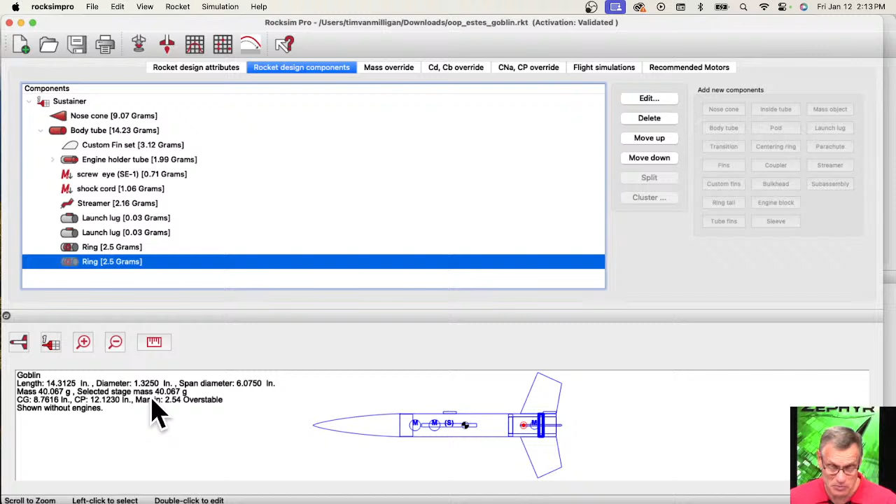So basically, if you were to upscale, you'd start from whatever RockSim file you had. Since this is 1.325 inches in diameter, first we got to figure out what scale we're going to scale this up to, because there's a feature under the Rocket menu where you can do a scale by a scale factor. So you need to know what scale factor it is, and to get that you got to do a little bit of math. Get out your calculator, and I'll bring up a calculator here.

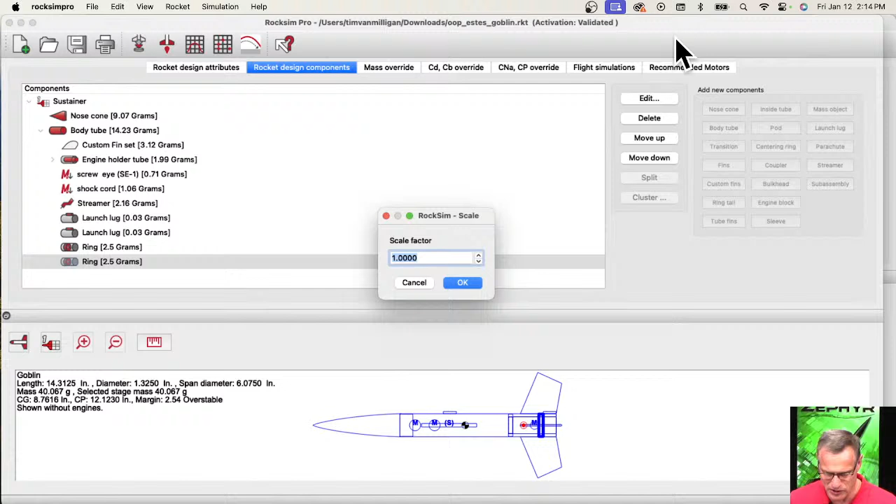Here's a calculator, and we're going to take 3 inches, because that's the new size, and divide it by this diameter right here, 1.325. Divided by 1.325 equals 2.2641. So we're going to copy that, and paste it right there... it didn't paste. Was it 46? 2.264.

And we hit scale, okay, and what happened was it just scaled it up, and it's just a smidge under 3 inches, so that's close enough. So when you do that, now your fin has been scaled up. However, there are some problems with this design.

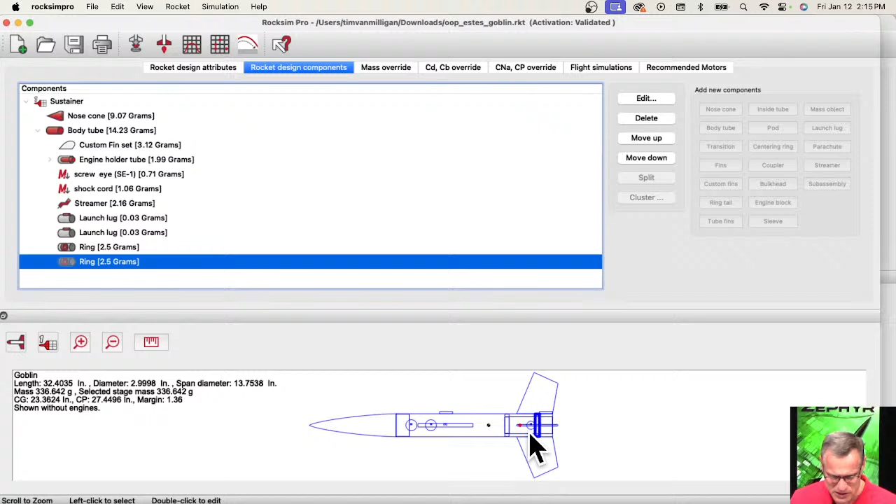We talked about this a couple weeks ago when we talked about scaling rockets. If you look at the motor mount diameter, here's the engine holder tube. If I open that up and look at this, we have an inside diameter of 2.15 inches. That's massive, bigger than a 54 millimeter. You could put a 54 millimeter in it, but you're probably not going to fly this 3-inch kit on a 54 millimeter tube.

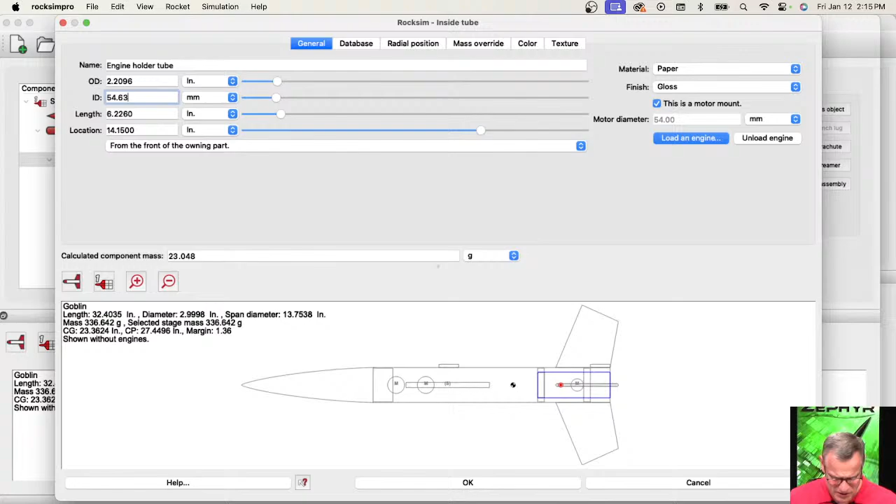That's the one issue we talked about, and you can see that by going back to the archives on the website. Just come here and come down here, I think that was just like 2 weeks ago. Okay, how to upscale your fins right here. That was episode 149, and here's the link to it.

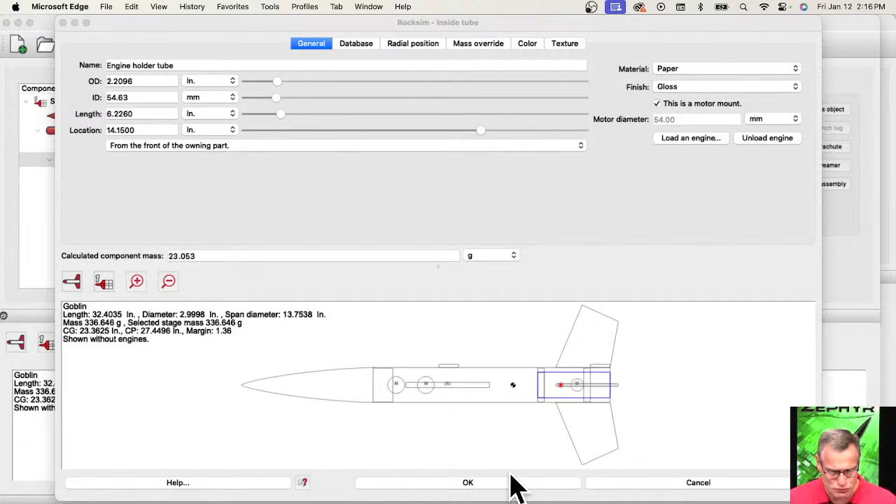So that's one way to do it, is just to scale up the rocket. Another way to do it is, let me cancel out of this, you can upscale the fin by itself. But basically it's the same thing. You're going to scale by the scale factor, and then save the fin by itself.

So to do that, you go here to the fin. You got to find the fin, open the fin, and this is a custom fin. Custom fin means it's not a trapezoid. It looks sort of like a trapezoid, but to be a trapezoid you have to have 2 parallel edges, and there's not 2 parallel edges on this fin at all. So that's what makes it a custom fin.

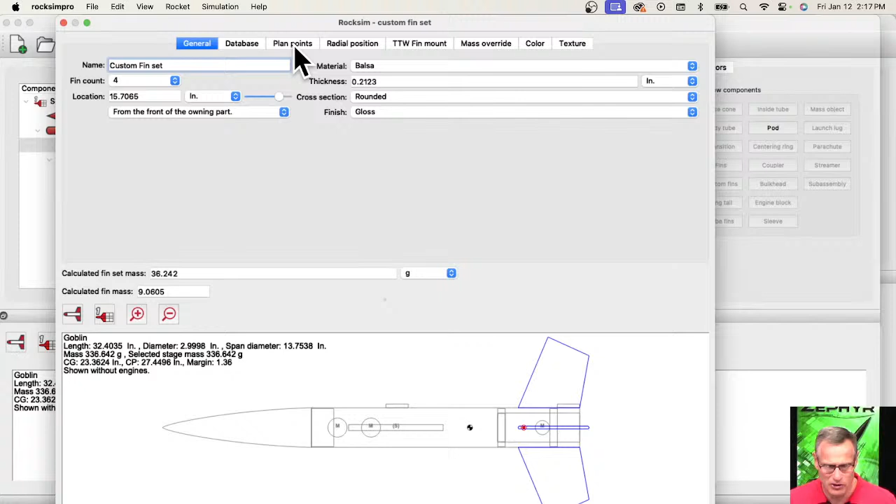If you come here to the plan points on a custom fin, right here, this button is the scale button. And if I click on that, again it brings up that scale factor thing, and then you can scale it.

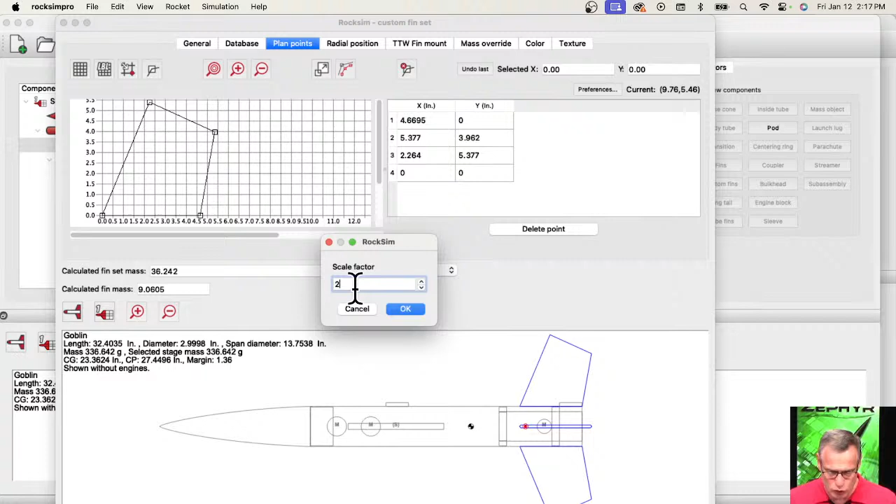So if I scaled it by, you know, 2, you're going to see that the size of this fin is going to be twice as big. And it is, it's twice as big, and it actually shifted it. It scaled everything on the fin, including the location from where it was. So I'm going to say from the base of the owning part, I'm going to say 0, just to show you how big that fin got.

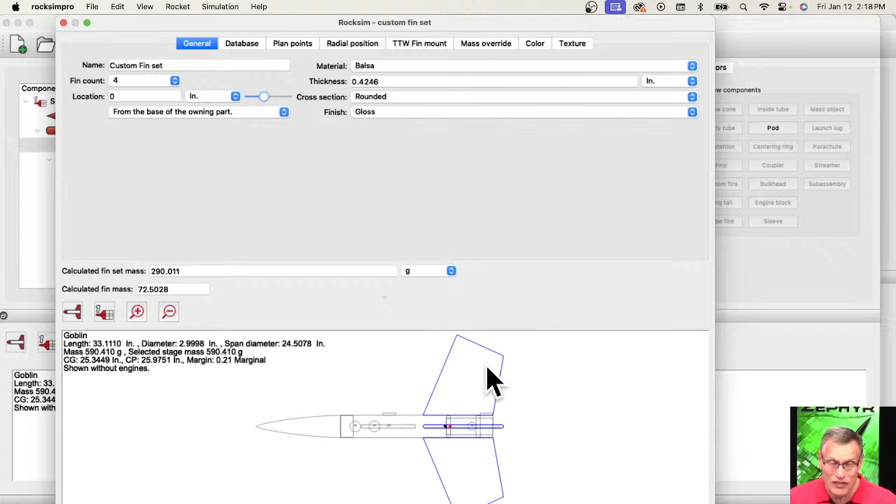At this point, what you could do is go to the database tab, and you can save this into the database. So we could say super size, this is an Estes, or you can say custom manufacturer, 2X. And you can give it a different description, you know, Great Goblin, super sized fin. And then you can save it to the database.

And you're going to get this screen, and then you just click OK. So now I've just saved that particular fin to the database.

Now to use that fin, I'm going to open up a new design. Let's see what we can open up here. I just want basically a rocket without fins on it, or something similar. If I go to my RockSim designs, here's the catalyst, I'm going to open that up. It asks to save changes - no, I don't care.

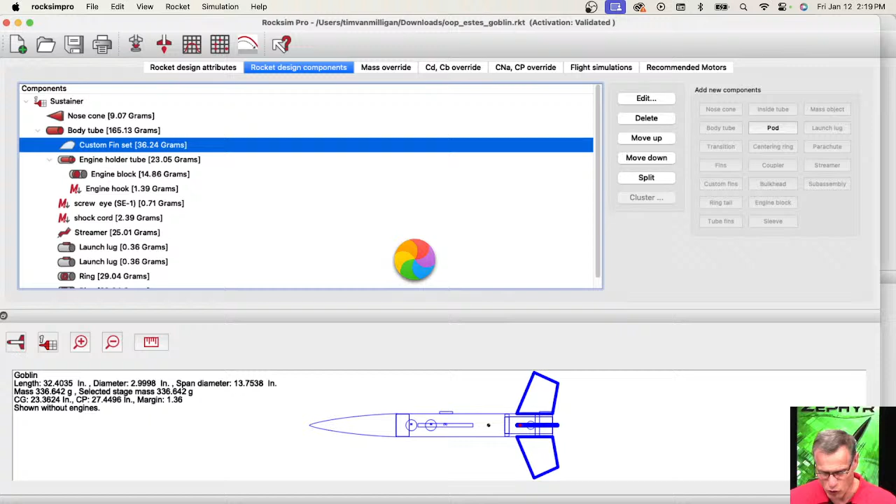Let's see if it's going to crash on me, because it usually crashes when you're opening a new design. Nope, it didn't crash. Okay, so here's the catalyst.

And it already has fins on it, so I'm going to take those fins off. I'm going to delete the fins, and I'll say yes.

Okay, so now my fins are gone, and now I'm going to add fins back. I'm going to select the tube where I'm going to add them, and then come down here to custom fins. When you click on that - my computer's running a little slow today, I've got too many things open at once. Let me start closing some things up to free up memory.

Okay, so what happened was RockSim popped up over here. It's looking in the database. This blue fin is just a random shaped fin that it puts on the rocket.

But if I come down here and look in the database, I should find my custom fin - that's this Super Goblin fin. Well, where is it? There it is, right up there - it was on the top.

And you click OK, and it should draw it here in just a second. There it is, it drew the new fin on there. So that's another way to do it.

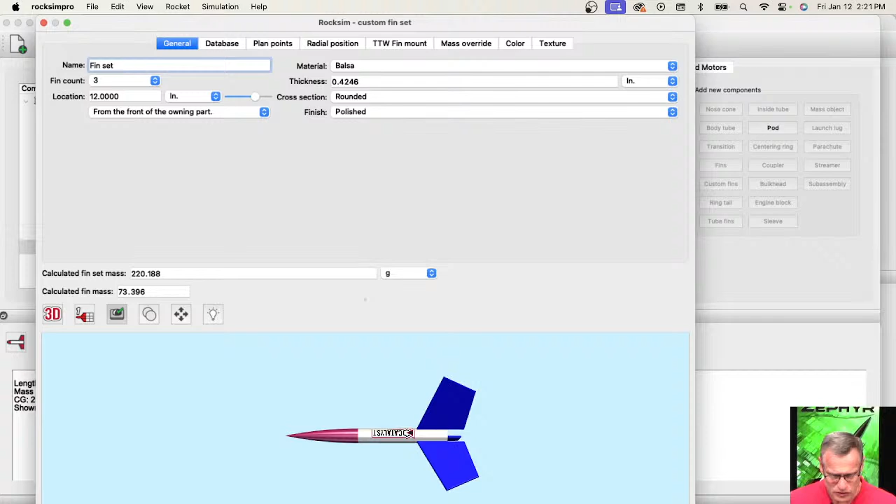So I'm going to click cancel out of here. Now the third way to do it - and this sounds like the way he described in his email to me. Basically, he had the fin because he bought the kit, and he traced the fin on a sheet of paper, getting points for all the corners, and then tried to input them into the design.

So let's show you how to do that - this is a third way of doing fins. What I've gone and done is get a piece of graph paper, because I recommend using graph paper when tracing fins, as it makes it easy to find the dimensions. On this rocket here I've got two fins because it's a two-stage rocket, but let's just delete one of them.

Come on, delete you. Okay, so random fin shape. The first thing you want to do is put the corner of the fin - this is the corner that attaches to the tube, and it's the front edge, the leading edge, along the body tube here - right at an intersection of two of the lines.

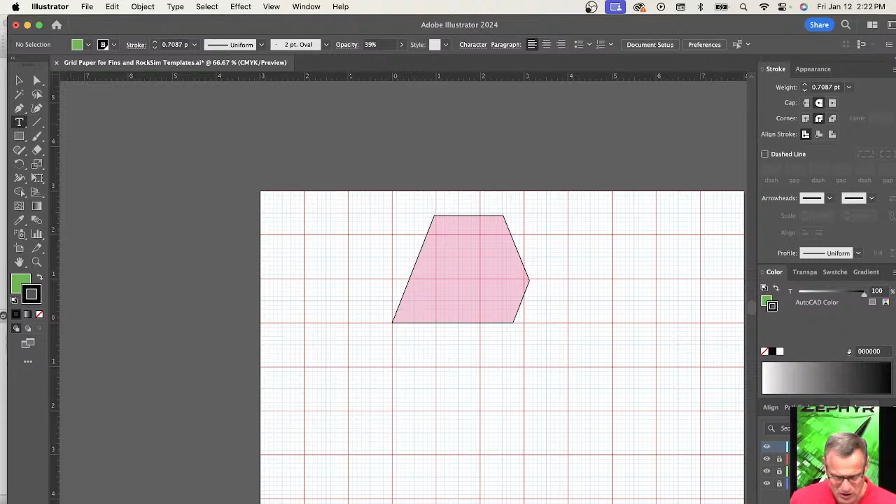And what I'm going to do is label all my points. So this is my 0, 0 point. I'm going to get a text box and type in 0, 0.

Okay, so then I'm going to measure all the points. The next point we want to measure is this one right here, the back edge. If I zoom in, these red squares are 1 inch apart, so we've got 1 inch, 2 inch, and here's 3 inch - so it's not 3 inch.

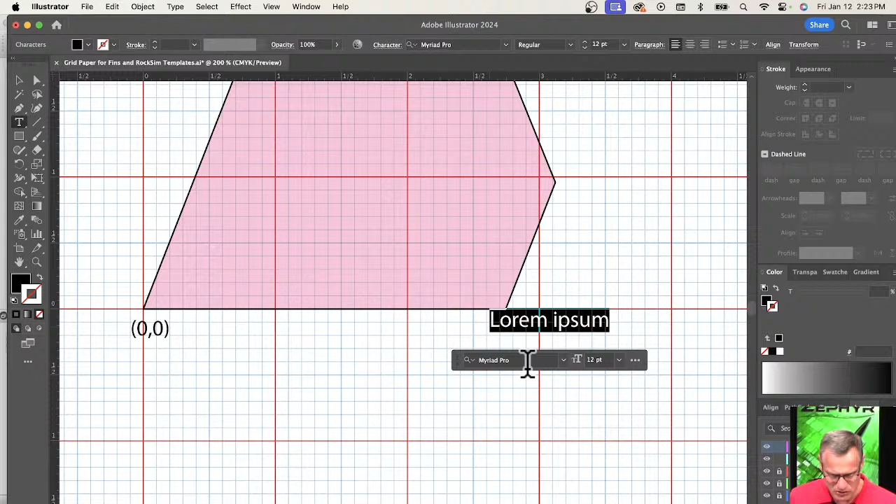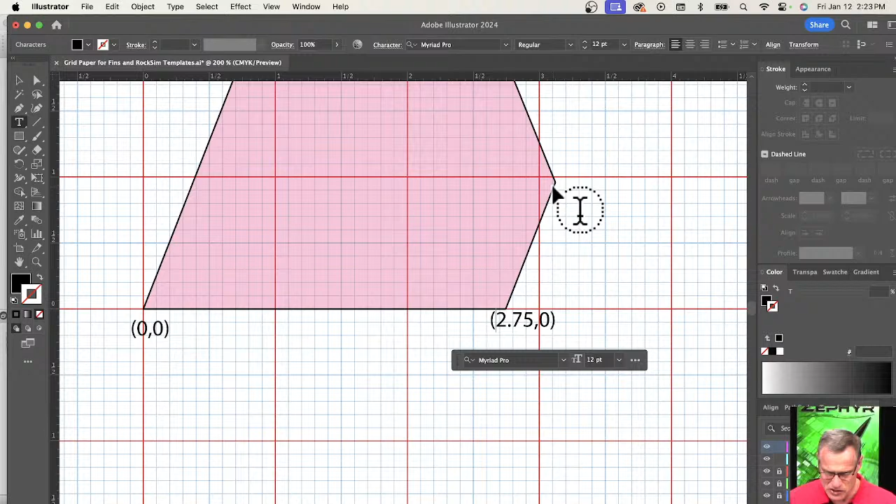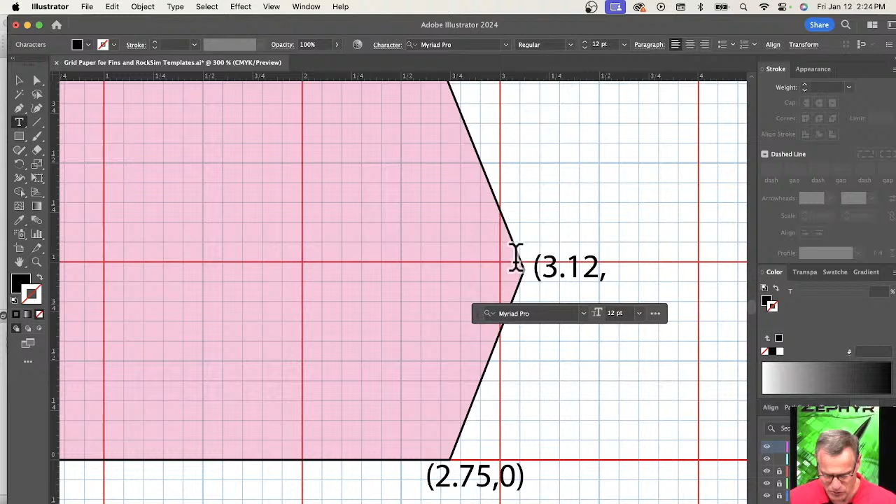So now we can go to this point right here. This red line is 3 inches, so we're going to call it 3.12, and estimate comma how many inches off it is. This is 1 inch right here, so it's not quite 1 inch - this blue line right here is 0.9, and I'm going to call it 0.96.

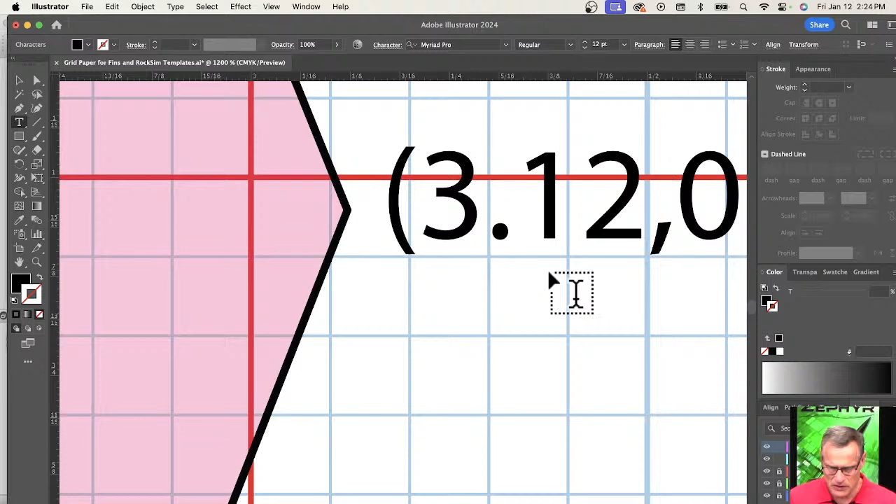0.96 inches. Okay, let's zoom out. Okay, so that's that point.

Oops, I didn't want that, I was trying to make a new text box there. Okay, so now let's go to this one up here. This point right here is 1, 2. This blue line right here is 0.5, so we'll call it 2.53.

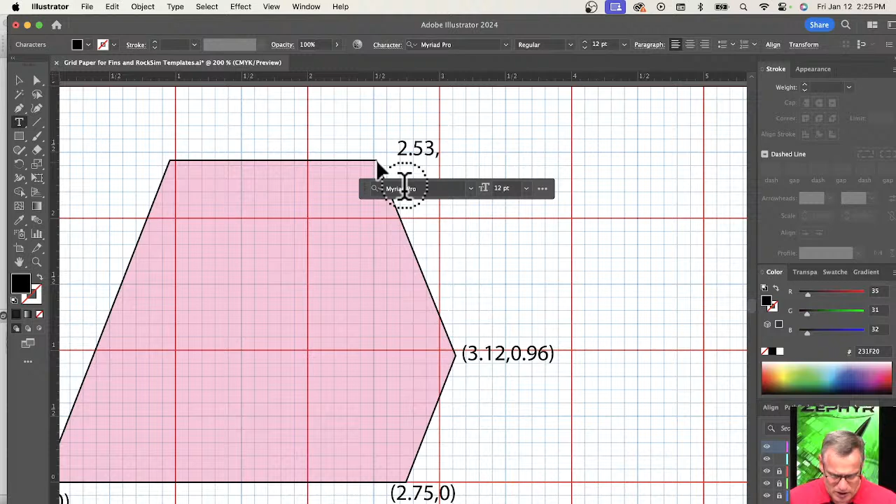I need my text tool. 2.53 inches, and then how many inches off this way? 1, 2, and we'll call it 2.44. So that's that point.

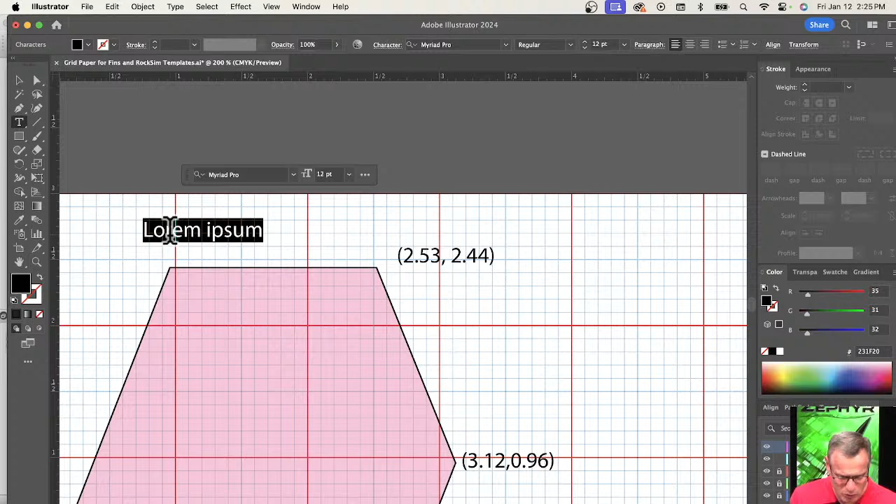And then the final point is right here, underneath this box. Box, go away. Okay, so this is 1 inch right here, this red line. So we'll call it 0.95. And it's going to be on the same line as this, 2.44. So: 0.95, 2.44. So here are all my vertices that I need to put into RockSim.

So I'm going to come here to, where'd my RockSim go? There it is. So we're going to add a new fin, and this is a custom fin, remember. So we're going to add custom fin.

And it's running really slow. I've got so many things running right now. Let me quit some things, see if that helps speed things up at all. Get rid of Spotify.

Okay, so again, it's going to look into the database, and I'm going to cancel out of it this time. And we're going to go to the plan points. Let's see if I can make this window.

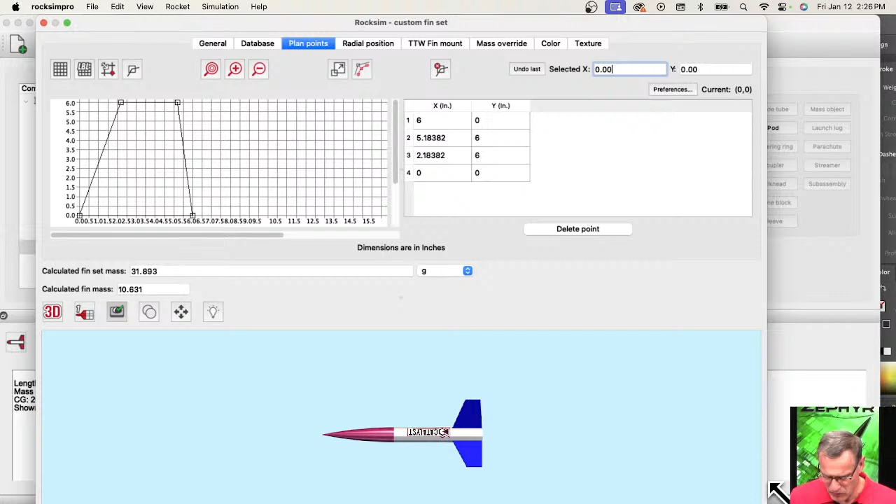Okay, so we need 5 points for this design, so I can just click on here to add a point, and that will give me 5 points. And now we're going to put in all the coordinates right here on this grid. So the 0,0 point, point number 6, is the front one, and this point right here, where it attaches at the back end of the tube, is point number 1. So we're going to work in reverse order. So 0,0 is that front point. So then the next one is 0.95 and 2.44. So that's this one.

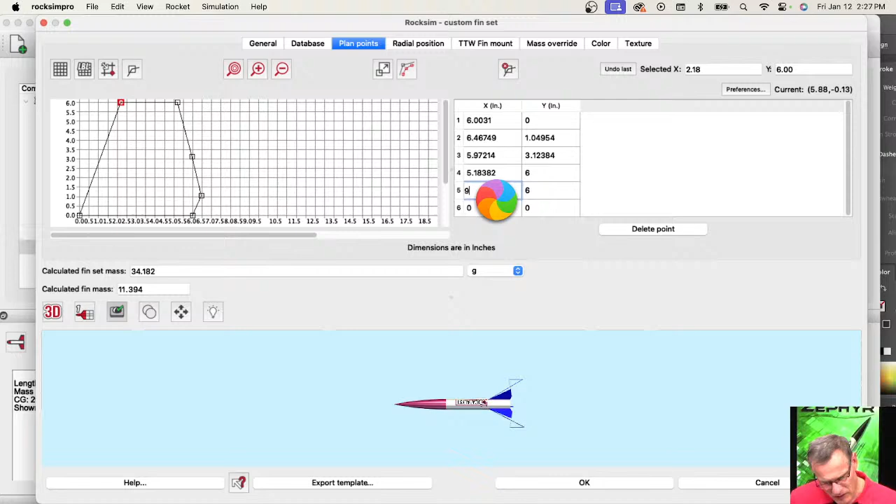0.95. Come on. 0.95. It's running so slow that it just crashed.

All right, I got RockSim open. Let's go open recent, catalyst. And let's get rid of these fins again. This is still running slow. This thing came up here, so okay, I don't care about that.

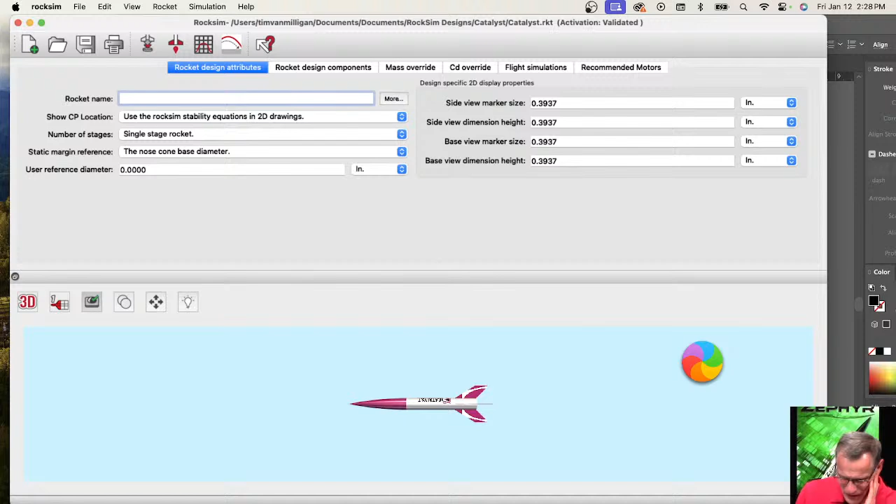Okay, rocket design components, come on. What can I close? I think it's this program here with all the coordinates on it. Quit that. I'm going to take a screenshot of this, so all I need on that program is that. So I took a screenshot, and that way I can close this and try to free up some memory. Don't save.

Okay, so back to RockSim. I'm going to clear out this fin. Now the fins that we have here are pretty small for this rocket. Let's close this too. Really delete this component, and I want to say yes. Okay.

All right, so now we're going to add the fin back. I think you get the idea, so we want a custom fin. Anything else I can close? Let's close Microsoft Edge. Okay, so we've got the rocket drawn right there.

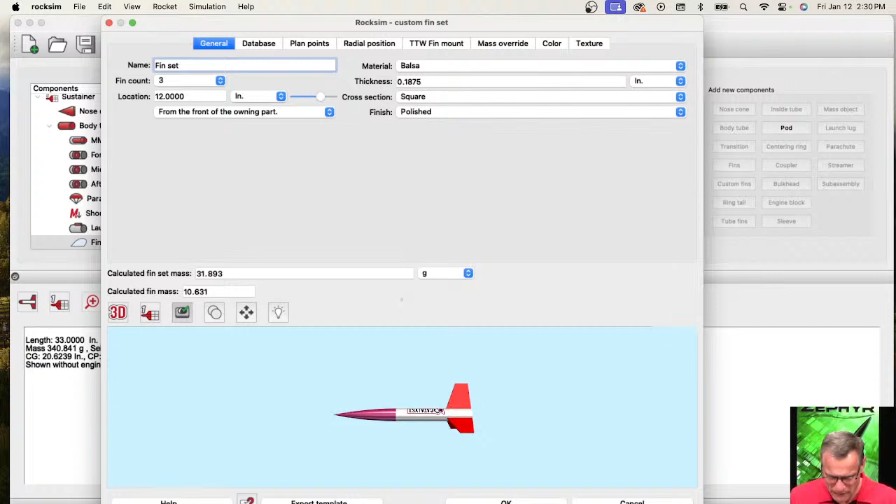Cancel out of the database, go to the plan points, and I need to find that Finder window and put it on the desktop. There's that screenshot.

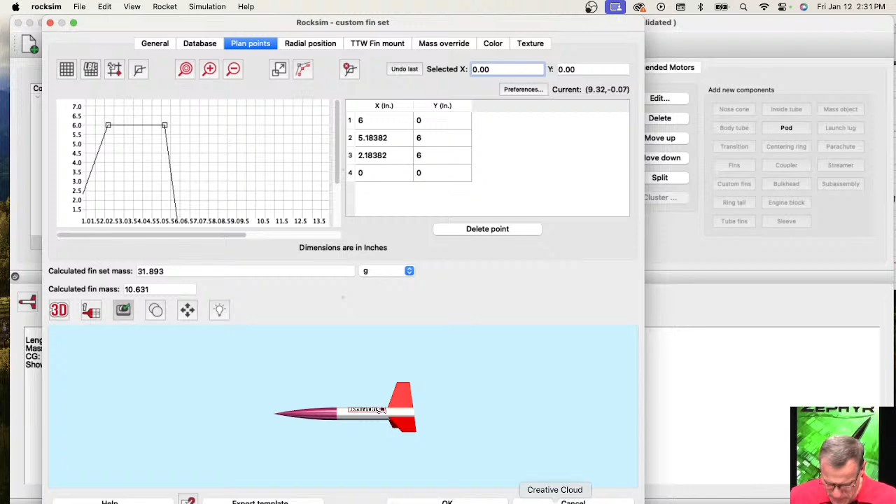Okay, close that. Okay, so here is my points. But just put it right behind everything. I can't see it. Now we'll have to go back and forth. How is this program, Preview? I'll just slide it off the screen here. Come on.

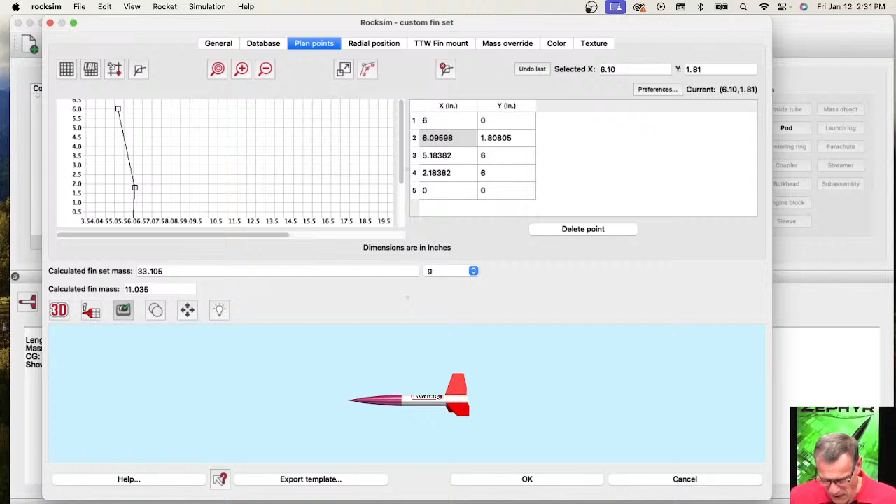Okay, so my first point, I need a fifth point, so I'm going to be here again and just click on it to add a point. Come on, add a point. It's just running so slow. Normally RockSim is blazing fast, but when I've got so many things going on, you know, I've got YouTube streaming and OBS software that runs it.

Okay, so there's my 5 points, and what we'll do is this one is 0.95, so I've got to double click it, 0.95, hit the tab, and this is 2.44, hit the tab again, so we're going to go to the next point, and that one was 2.53, and it's also 2.44. I'm going to go to this point.

And this point was 3.12 and 0.96. And then the final point is 2.75 and 0.

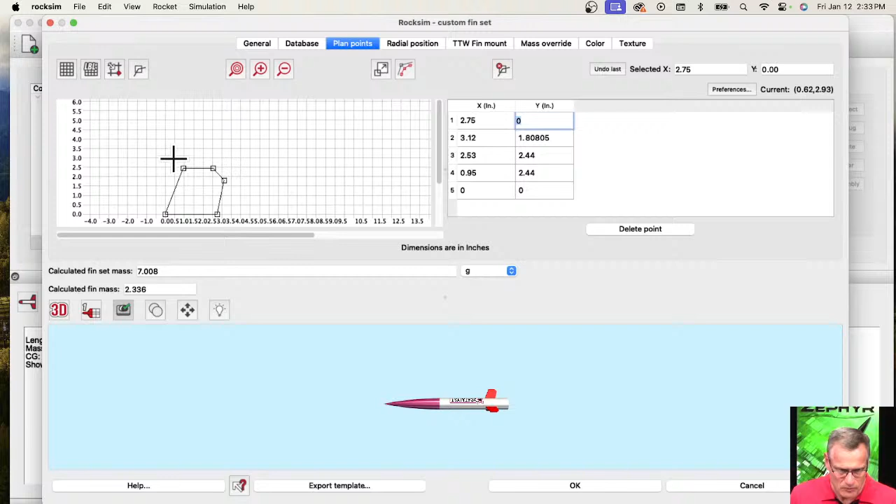Okay, so that is the fin that we had drawn in the other program. So this doesn't look quite right, something's wrong. This point right here is too high, 3.12. Let's see this point here. This didn't take. That should be 0.96.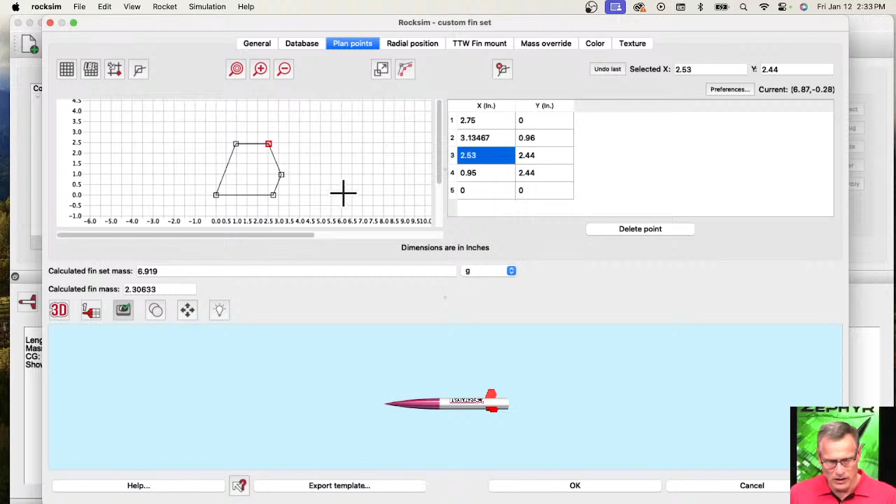So now that's the fin, although on this particular rocket it doesn't look right, but that was the fin that I had traced on the graph paper.

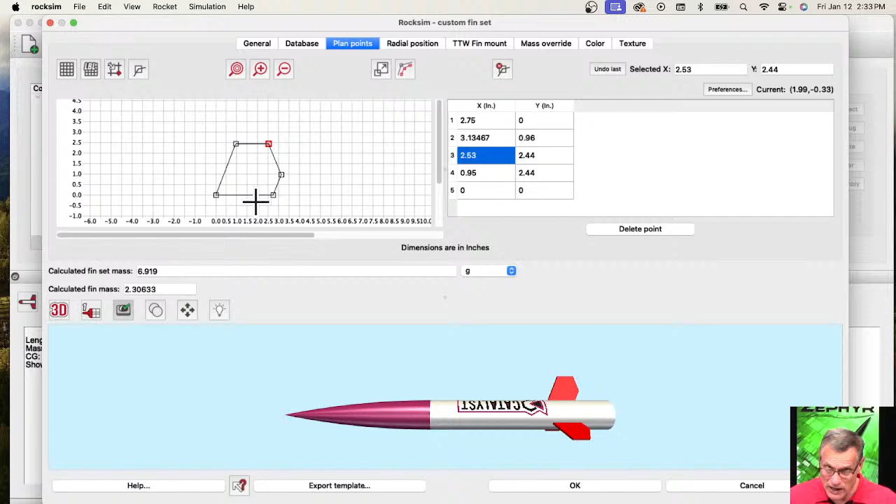I had used the exact coordinates for all the corners to put that onto RockSim. And again, if you save this to the database, you can call up that fin for any other design. You don't have to, but that's just how it works.

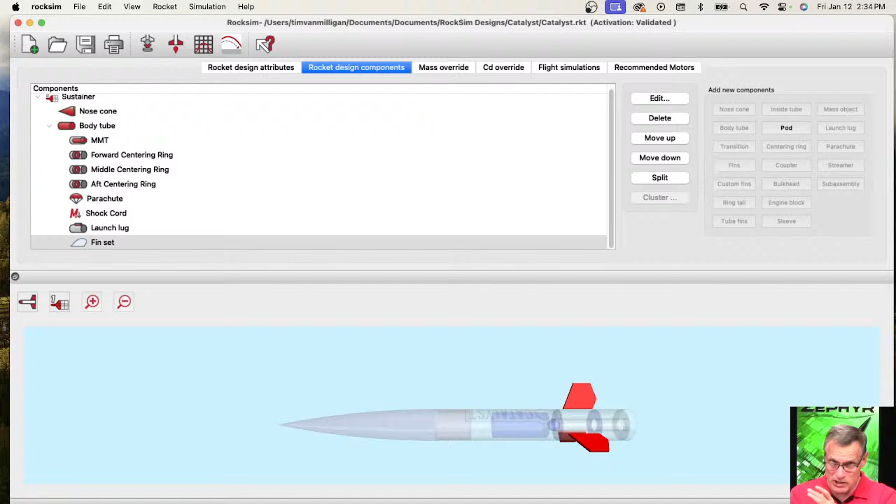I think that answers how to put a custom fin into RockSim. There were three different methods: one, we upscaled an existing RockSim design; second, we upscaled just the fin and saved it to the database; and third, we entered the coordinates exactly from what we traced from the balsa sheet.

Let's see if we got any other questions. Craig Hefferman asks, how do I add an ejection charge baffle to my design in RockSim? So on this design here, let's go to 2D.

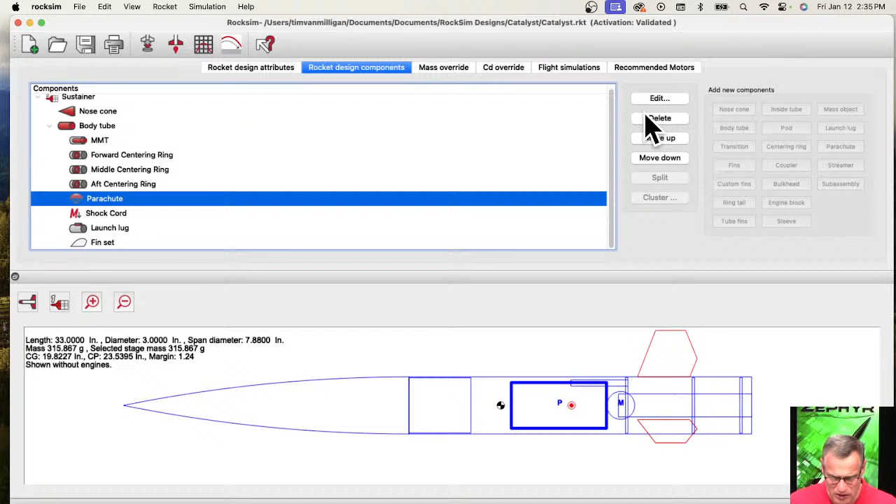Let's say we want to put a baffle right here where the parachute is. So let me pull the parachute and we'll just delete it to get it out of the way. Okay, so now the parachute's gone.

This right here with the M on it is the shock cord, we'll leave that alone. This little tube right here is the launch lug, we'll leave that alone too. So what does the baffle consist of? Typically it's two bulkheads and maybe a tube that runs through the middle.

Adding a bulkhead is pretty easy, just add the components the best that you can. What's important is that if the components are on the inside of the rocket, the only thing that really matters is the mass and the location of that mass.

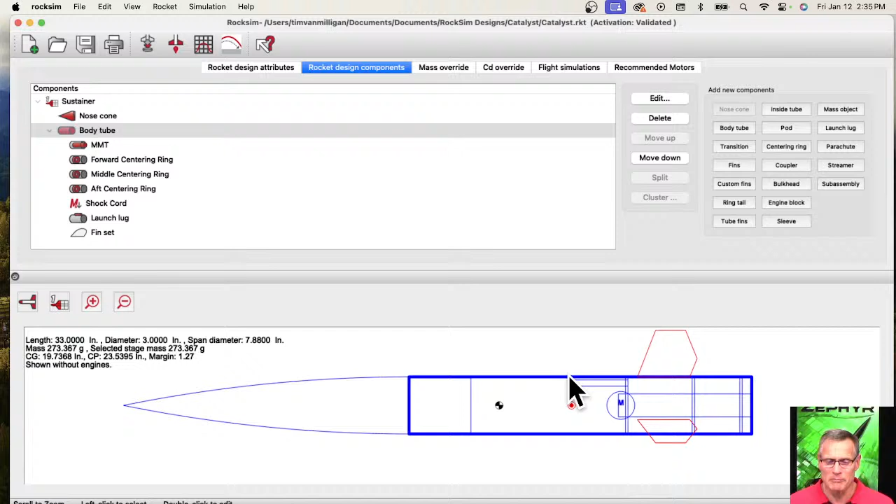So say your centering rings, instead of being concentric with the hole right in the middle, say your hole was off to one side — that's typical in a baffle. You've got a hole off to one side where the ejection charge goes through, and then on the forward ring the hole is on the other side, so that if you look at it from a side view, the gas goes up, then has to turn a corner and continue going up.

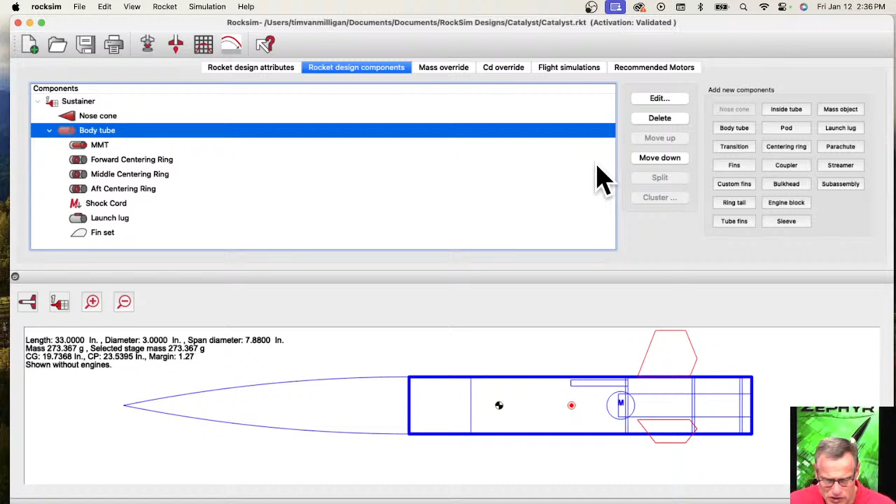I can actually do that. So let's create inside of here — we're going to put our centering rings in first. You've got to say where your centering ring is going to go. I selected the body tube, and I'll cancel out of the database because that always comes up first. Let's change this to a side view.

Okay, so right now my centering ring is right there, and we'll call this one the back centering ring. Oops, too far back. Okay, so we'll go right there. We'll give it a thickness — let's call it 1/8 of an inch.

So now it has thickness, and it's looking for an ID. Let's call it a BT50 on the inside, so that's 0.976 inches. Did it take? Come on, it's running so slow. Well, it won't take it unless I uncheck this. 976 — okay, so now it actually put a hole in that ring.

We can't see it because it's from the side view, but the hole is right in the middle. So we'll call this the aft bulkhead for baffle.

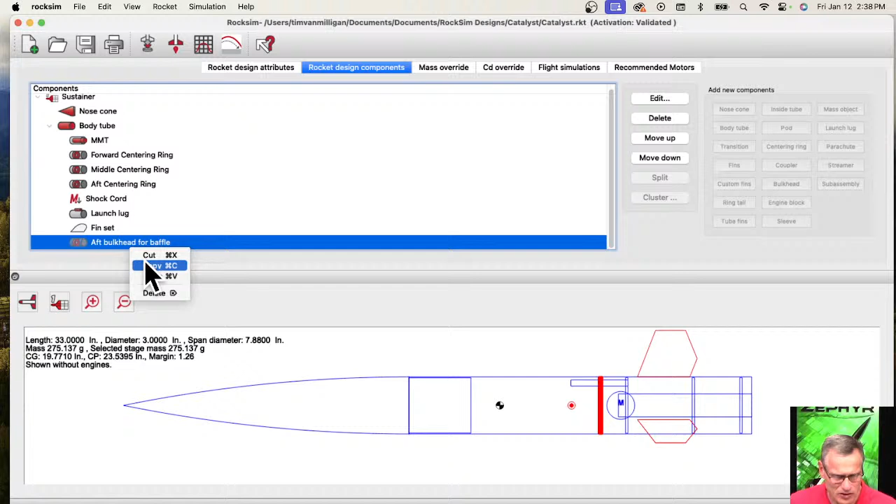Okay, so that's one ring, and now there's another ring like in front of that, and we can just duplicate this. So I'm just going to highlight it, do a copy, then select the body tube, right click, and say paste — it pastes another ring right on top. Now we need to change the location of one of these.

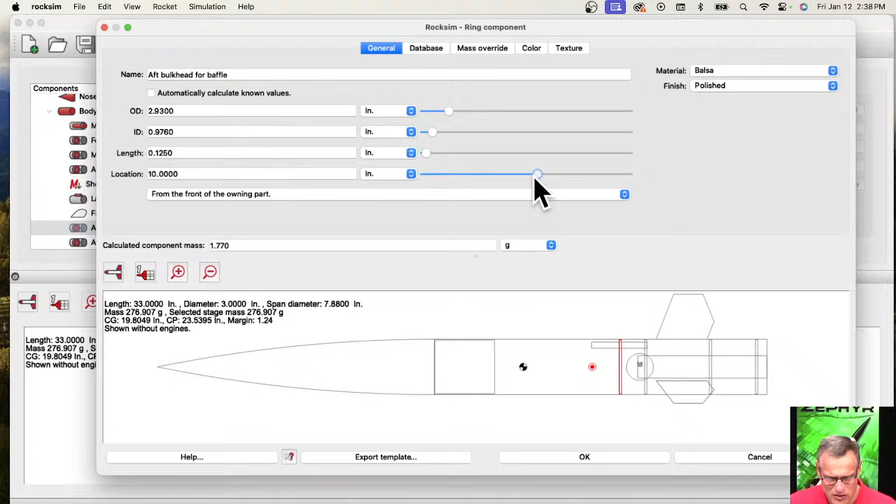So I'm going to change the location of this one, and I'll just slide it forward a bit. We'll change the name to the forward bulkhead for the baffle, and this one also has a centering ring in it. So I can click OK.

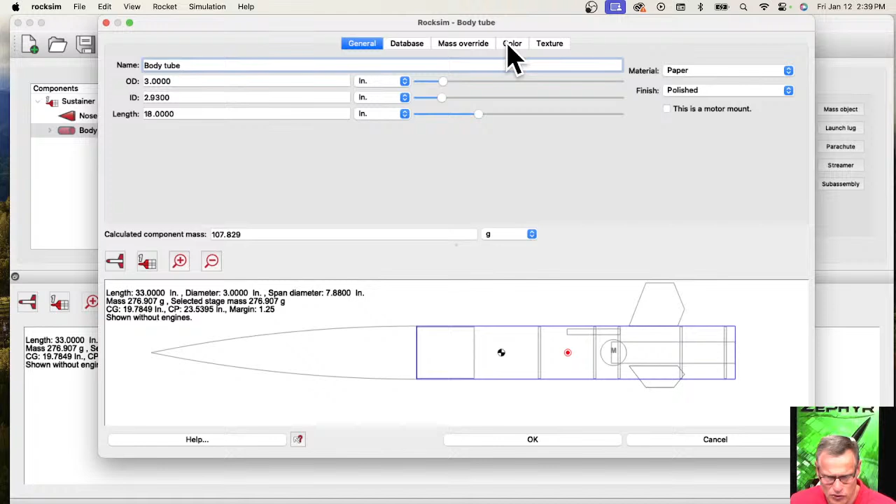Let me take this body tube right here and make it see-through, so we can see the holes. Come here to color and change the opacity to something real small, or you can even make it 0 if you want, and just click OK. Now if I go here to the 3D, I made that tube clear so we can see through it.

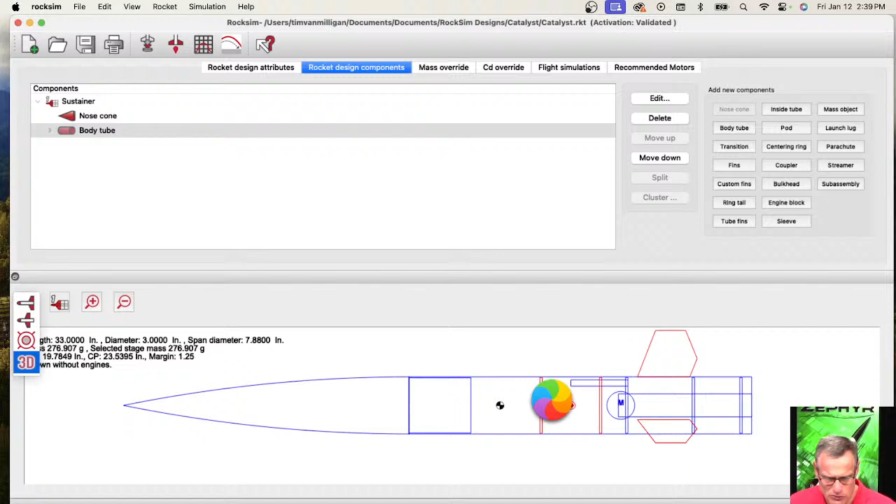So we can see these rings on the inside as soon as it wants to draw it. And why is it not doing that? Well, there it is — that worked.

Okay, so you can see the holes that are through the baffles, and now there might be a tube in here. If the tube is offset to one side or the other, it doesn't really matter for the weight. So let's put a tube in here.

So I got to select that body tube, and then we're going to say an inside tube. Click over here. It's running so slow, I'm sorry for that, it's just too much running on my computer right now. Normally it's blazing fast.

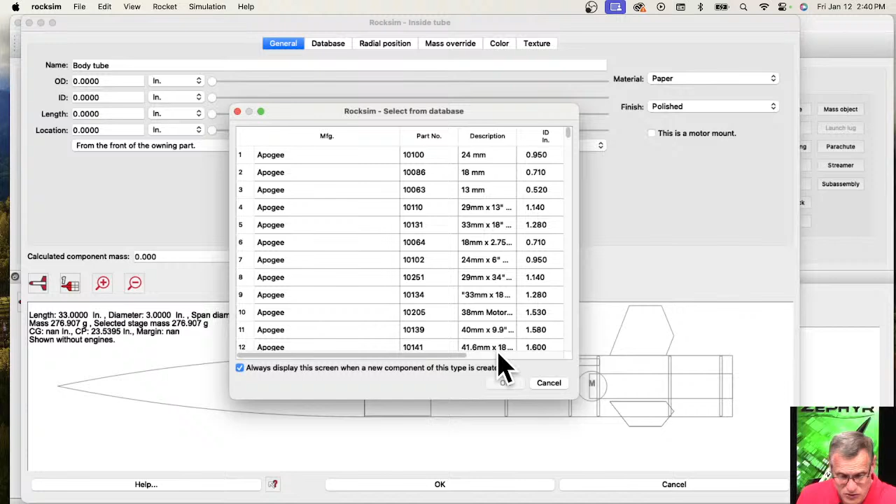All right, so this is the baffle tube. And I should have selected a diameter, so 0.976. I'm doing these numbers from memory, so 0.950. And we'll say the length is 2 inches.

Okay, so I put it right there. And I'm going to take that tube and slide it back. Oops, slid it too far. Okay, so you see what I did? I took that, I got my front baffle ring, my rear baffle ring, and I got a tube right there. And I'll say OK.

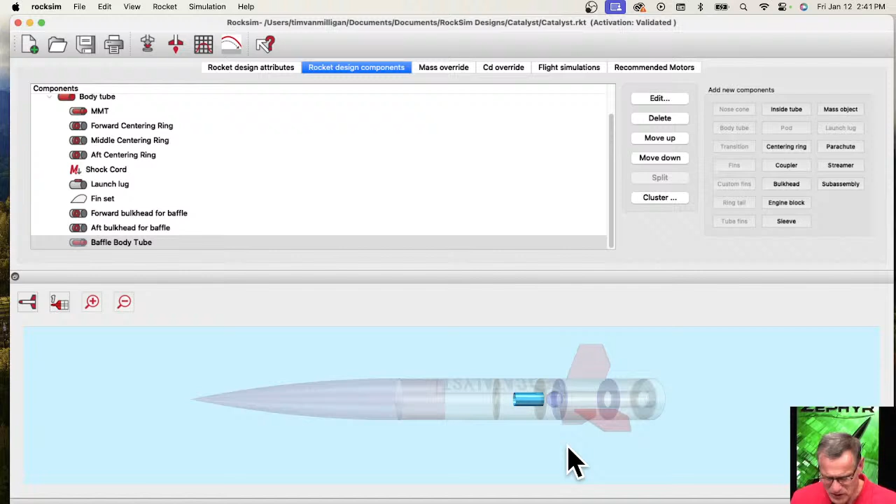And when we go back to the main screen, we should have a 3D view showing that tube on the inside. So there's the tube on the inside. So now, from a simulation point of view, it really doesn't matter that this is concentric, but in real life you'd probably have it off to one side or the other.

You might even have two tubes in here, a short tube on the back and a short tube on the front. You could model that in RockSim, and I can show you how to do it, but it's not going to make a difference when running the simulation, because RockSim only cares about the mass and where the mass is in relation to the center of gravity, where the rocket balances. If you wanted to move that tube off to the side,

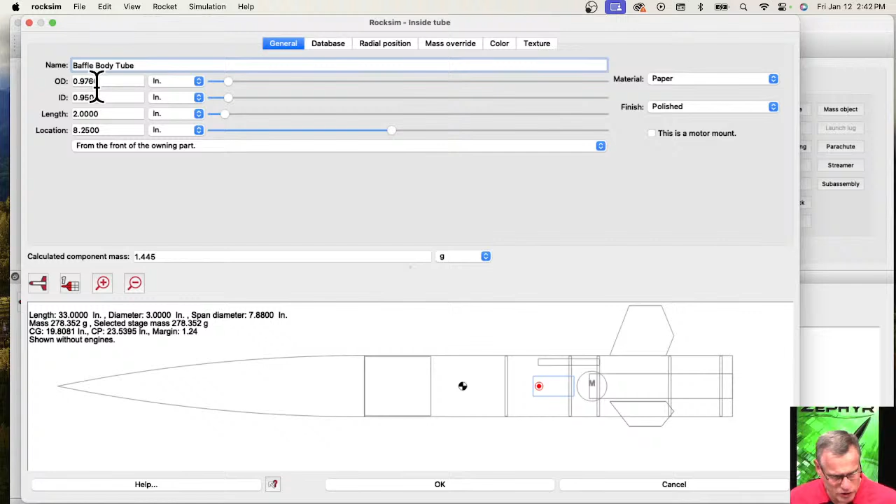I would go here to radial position, and see right now the radial distance is 0. If I change that, you can see I moved it off to one side, like right there. And click OK.

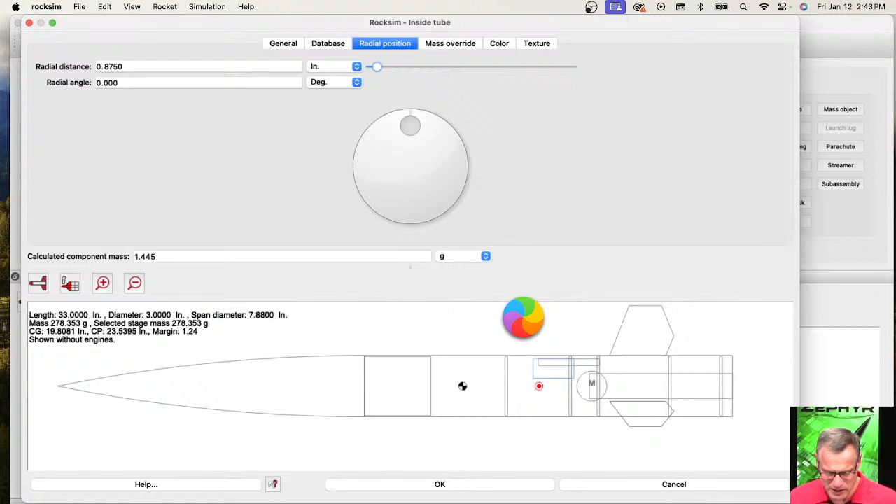And when we see it in 3D, we'll see it off to one side. But you see the holes are still over there. So now if you wanted to move the hole over to here, you can do that too. So that's my aft bulkhead.

And what we're going to do, as soon as it opens, while we're doing that, let me check here.

Okay, so people have been telling me that the Goblin was a BT-55, not a BT-50. That's good.

Okay, so here's the centering ring, and what we'll do is we're gonna just click this box right here, automatically calculate the known values. If I click on that,

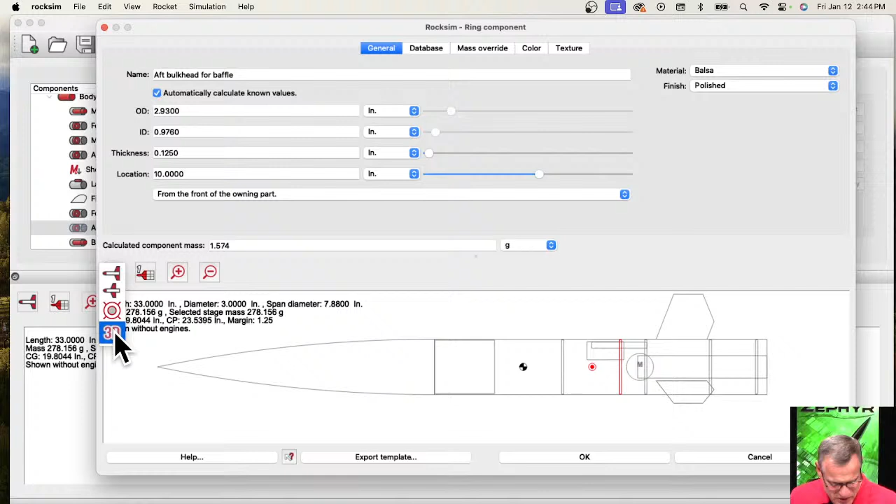I want to see this in 3D, see if it moved. Yes, it did. You see that it actually did move that hole. And you could, if you can see through the tube, that will verify that it's not a bulkhead.

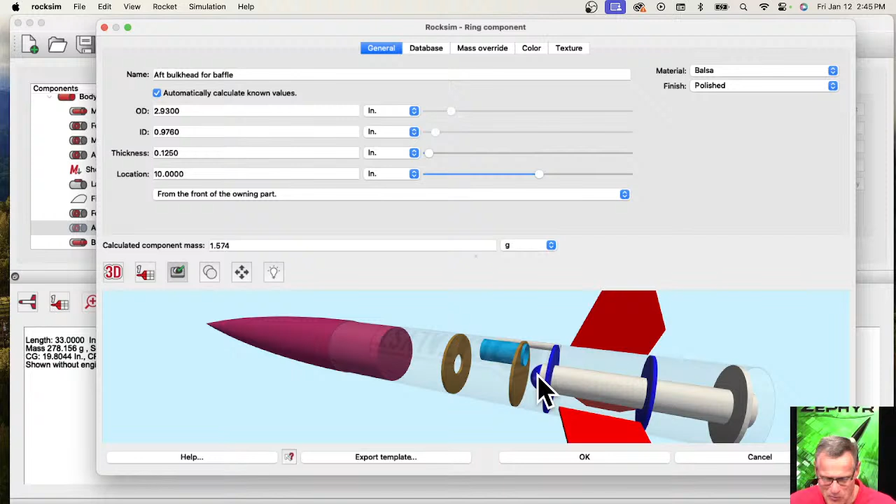So that could be a baffle. Typically, though, what you have is another tube on this baffle coming from this side, so the ejection charge has to come out of this tube where this sphere is. That sphere is the mass object for the shock cord. So the ejection charge comes out, has to come around this corner, go through that tube, and then turn the corner, come back down here, and then out through the tube that is not there. But that is how I would build a baffle in RockSim.

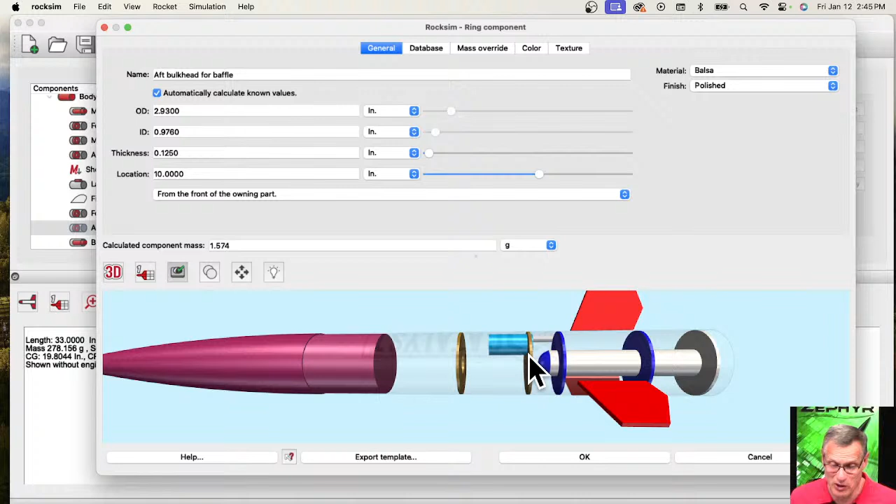If you wanted it to look exactly how you build it. But from a simulation standpoint, if I have two centering rings, it doesn't matter where the hole is, the centering ring is going to weigh the same. Because you're taking a circle and taking another circle out of it, and it doesn't matter where that other circle was located,

it's still going to weigh the same. If you wanted to do just quick and dirty, that's what I would do. And if you wanted to do it even faster, you just weigh all your components and just use a mass object. That's the really fast way to do it.

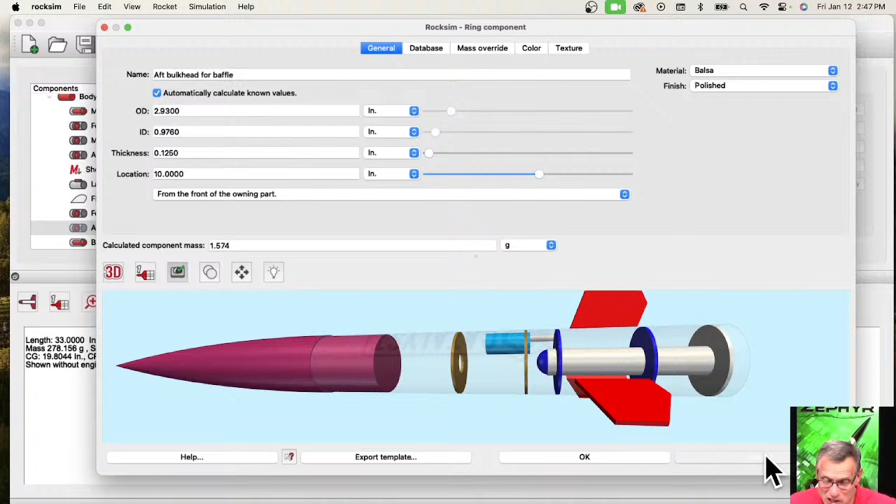Fatbank asks, can RockSim run on an iPad? And the answer is no. However, I've got a solution for running simulations, and that is to run the launch visualizer. The launch visualizer is in the cloud, and it can run on any web browser. So you take your iPad, open up your browser, and go to rocksim.com, and now you can run simulations. You can't design a rocket in the launch visualizer, and you can't modify a rocket, but you can do anything you want with the simulation. As soon as it's done loading, I'll show you.

Jeff Kortowski says, Thrust Curve used to have a simple simulator as part of their app.

So here's the launch visualizer. If I log in, I have an account here, sign in. Okay, so I am now signed in. If I go up here, you can see I'm signed in, and I've only got 91 credits available, because I was playing around this week using up a lot of credits, doing some weird stuff. Over here you can select the rocket design, and in my database I've already uploaded a ton of designs. But from the demo designs that come with the launch visualizer, there are 6 designs. The reason we did that is every user has their own disk space, because your simulations, once you run them, are uniquely yours.

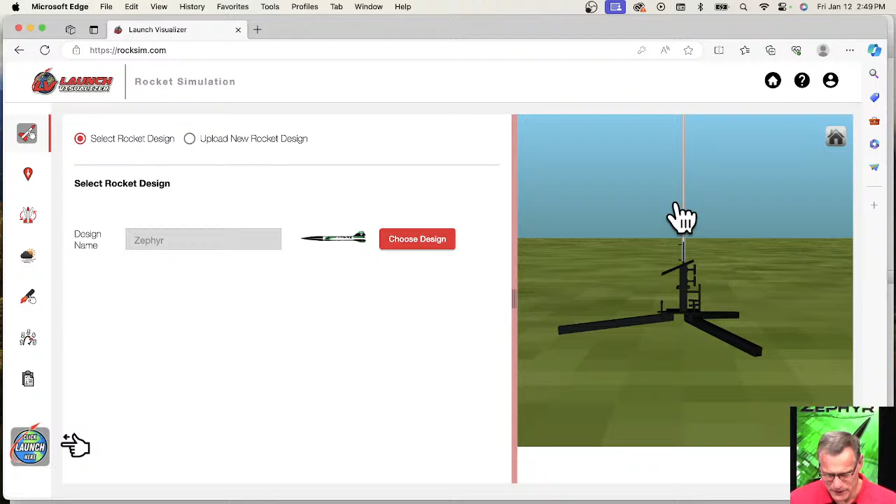So here I can load a Zephyr. It loaded it right here, and it's going to draw it right here in just a second. It's going to choose a high power launch pad, and there's my Zephyr rocket. Then you can choose a launch site.

Who asked the question that you can launch it on an iPad? That was Fatbank. Fatbank was in what city? Texas. Okay, so we'll search for a launch site in Texas.

Come on, my computer is just not liking today. There we go, Tripoli, Northern Texas. Click OK. And what it's going to do is search for that particular launch location, then load a map of that launch site. And there's the launch site.

This right here is a little compass. The black arrow points north, so I'm swinging around so that north is up at the top of the screen. You can see this is 3D view, and I can see the horizon right there, or look straight down on it. This looks like it's at the intersection of a grass runway somewhere, and that's where my launch pad is going to be.

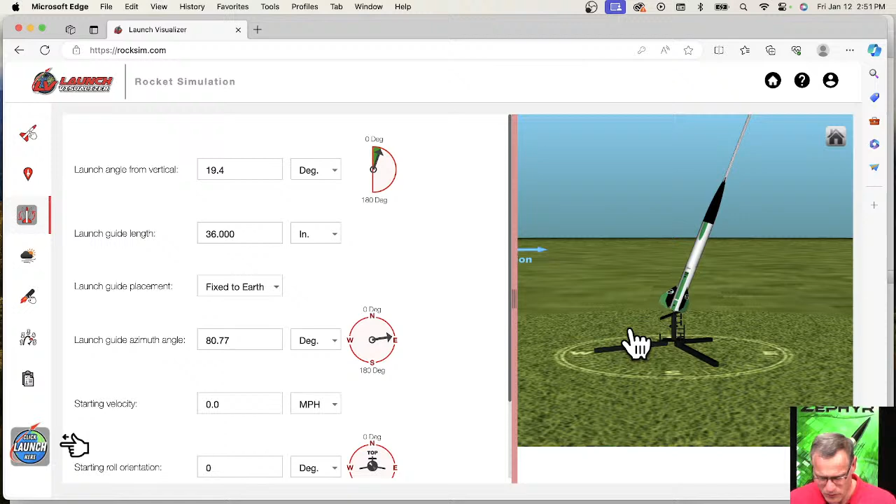Then I can change the launch angle. I've got a lot of room out to the east, so I'm going to angle the rocket and swing it around to the east just by dragging the sliders around. Okay, this is also three-dimensional, giving me a view of... what am I doing wrong? I've got to grab the right buttons. There we go, so if I look straight down on it, you can see I'm angled off to the east.

Then you can look at the launch conditions. I've got a steady wind, I'm going to make it 5 miles an hour, and it's coming out of the west. And we need to select a rocket motor.

So this is just like RockSim. You choose your rocket engine. Let's choose an Aerotech H100W, and let's choose the delay. Let's make it a 10-second delay. Click OK, and then we launch it.

And it tells me I don't have enough credits to run the simulation. Please purchase new credits. Oh, to get 10,000 credits is $7. That's cool.

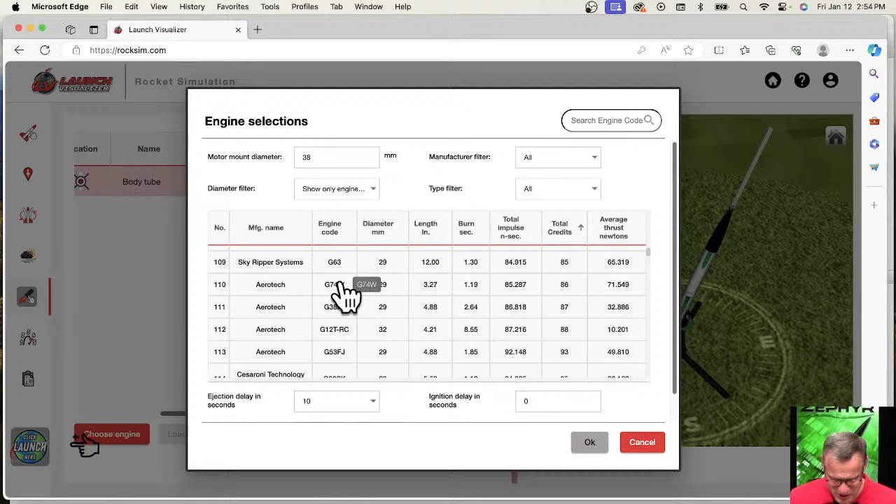Okay, so now if I scroll down, trying to grab this slider here, I'm looking at total credits. Okay, so let's sort by credits. Okay, so I can choose - I don't want a G12, I need something high thrust. So G74, 10-second delay, click OK. I think at 10 seconds I might be on the ground by the time the parachute comes out, so I better back it down to a 4-second delay. And now let's launch. I have 91, and I can use 86, so I can simulate.

And while that's running...

Carlos in Marietta, Georgia asks, regarding baffles, do baffles change the gunpowder volume needed for ejection charges? Typically no, because they don't take up a lot of volume.

Okay, so this simulation ran, and let's click here - it should have brought this up on a big screen. Something happened because I'm getting 0 seconds, but the rocket reached 800 feet.

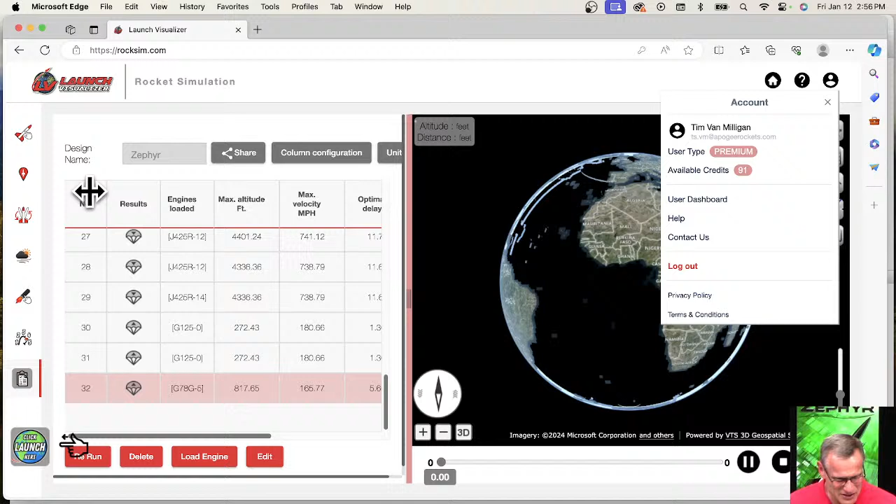Can I rerun that one? How many credits did I use up? No, I still got 91 credits. Did I not click here to launch? Simulate, come on. What's going on? It didn't simulate. But normally it still didn't use up my credits, so for some reason it didn't want to launch this design. What it would normally show is the rocket taking off from your launch site, and that one was in Texas somewhere - I'm not exactly sure where in Texas.

Jeff Gortowski says, we're talking about the engine baffles - can you make that an assembly, right?

Okay, so that's back in RockSim. Let me close out of here. So what he's asking is, can you put all these parts into a subassembly? And the answer is yes, but we need to create a subassembly.

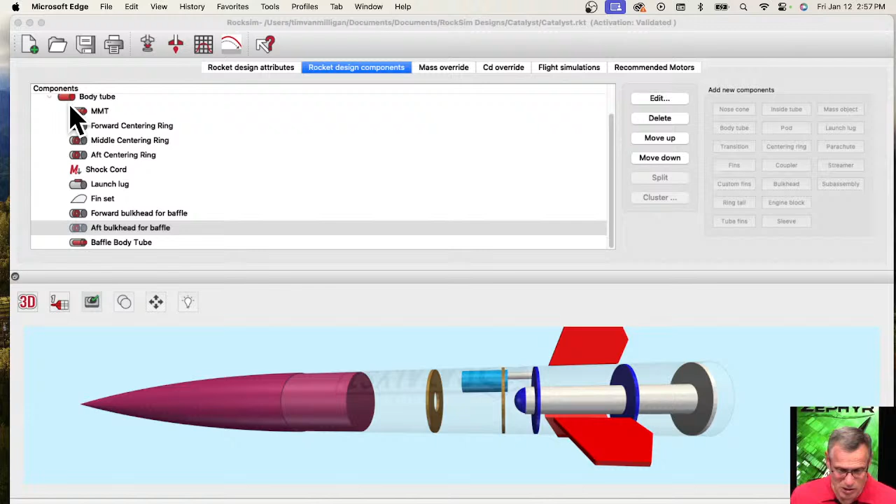So I'm going to add the subassembly to this body tube, and then you come over here - the subassembly is this button right here. And it's asking, is the subassembly owned by the body tube? And you can say yes. Then what it's going to do is put the part here. The subassembly part is a placeholder, so it's just where you can store other parts.

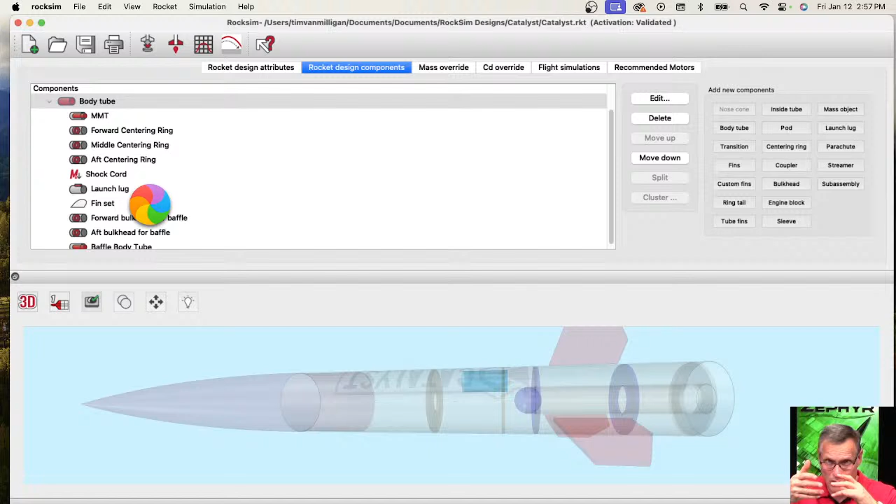And it's just taken forever. So we can call this Baffle subassembly. You're going to give it a file name, but I'm not going to do that yet - we're just going to click OK for right now. We're going to come back to this screen and save it. Maybe.

Because we're almost out of time, and it is acting so slow.

And Jeff Gortowski says, if you save the baffle as an assembly, you can use it over and over again in other designs - and that's true. Okay, so here is my Baffle subassembly right here. So now we need to add parts to it.

So I am going to take this part right here, and I'm going to copy it - actually, I'll cut it, because when you cut it actually copies it. Then you can paste it somewhere else. So then I'm going to come back up here to the subassembly. Come on. And right click on it and say paste. I'm sure this is going to take a while.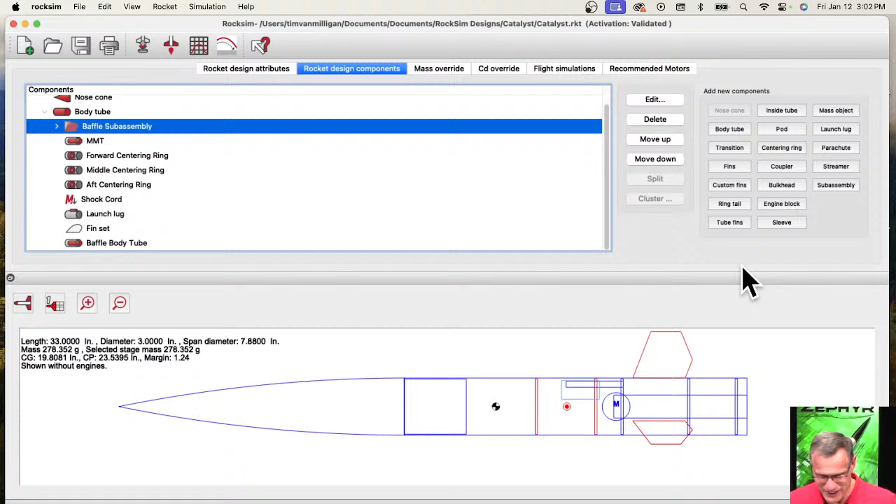Okay, so let's stop that because this is painful when it's running this slow.

I do have an extra treat for you today. At 3 o'clock, which was just 3 minutes ago, I released a brand new rocket video, and this video is about how to make carbon fiber tubes like this one right here. It's very lightweight. This whole rocket right here, I just weighed it before this episode, and it's under 5 grams, and most of it is in the fins and the glue that I put on.